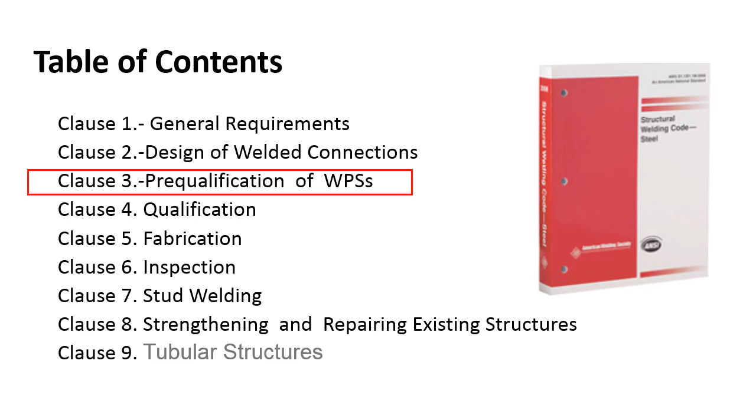Here's our table of contents for AWS D1.1. We're going to get into Clause 3, pre-qualification of WPSs, which is pretty much the meat of this welding code. Clause 3, 4, 5, and 6 to me are the heavy bulk of the code, and now that they've added tubular structures, Clause 9 is pretty important too. I'm not saying Clause 1, 2, 7, and 8 aren't important, but they aren't the meat of the code to me. They're a garnish - like when you go out for a steak dinner, they're the side order, some kind of side salad. Not the main course.

Pre-qualification of a WPS: welding procedure specifications shall be defined as exempt from the WPS qualification testing required in Clause 4. All pre-qualified WPSs shall be written. In order for a WPS to be pre-qualified, conformance with all of the applicable requirements of Clause 3 shall be required. WPSs that do not conform to the requirements of Clause 3 may be qualified by tests in conformance with Clause 4. For convenience, Annex P lists the provisions to be included in a pre-qualified WPS, which should be addressed in the fabricator's or contractor's welding program.

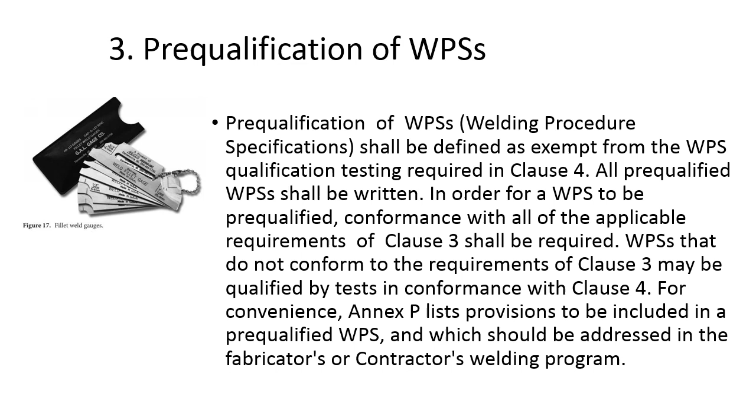So that's telling us what I've said three times already - you've got to write it, and if you don't follow all the criteria as laid out in Clause 3, you're going to have to do a qualification per Clause 4. Annex P isn't technically part of this code, but it sort of is. It just lists all the provisions to be included in a pre-qualified WPS - a little checklist you go through to make sure you've addressed everything. Not everything is applicable to every type of weld, so when you're writing one, go into Annex P and take a look at what they've got going on.

Annex P, informative: some important contents of a pre-qualified WPS. Base metal and filler metal combinations - what are you welding to what, you need to address that. Minimum preheat and interpass temperature requirements. Limitations of WPS variables: amperage, voltage, travel speeds, whatever is relevant to what you're welding.

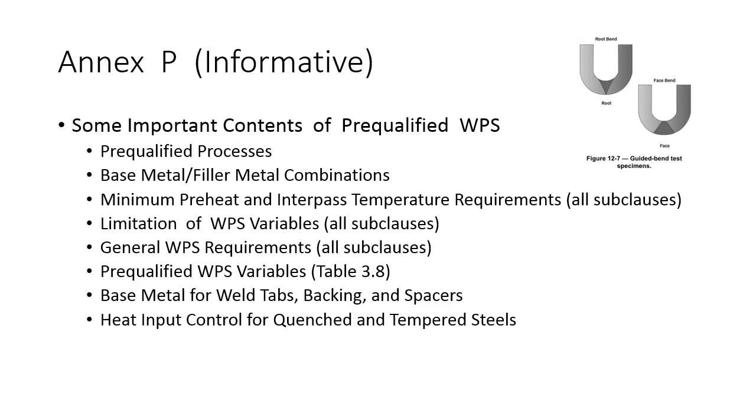General WPS requirements. Pre-qualified WPS variables: shielding gases, voltage, amperage, whatever - that's listed in, I think, Table 3.8. Base metal for weld tabs, backing, and spacers. Heat input control for quenched and tempered steels. So Annex P is just going to line out everything you need to do for a pre-qualified WPS. You go down through this checklist and make sure you've identified everything, write it down, double check it a couple of times, and you should be ready to go.

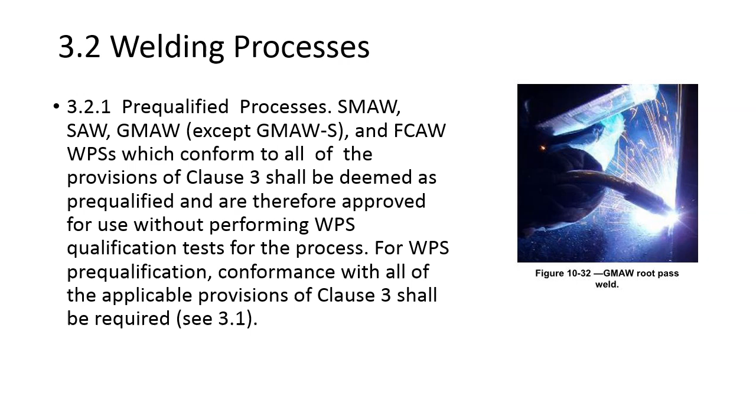Welding Processes, 3.2.1, pre-qualified processes: shielded metal arc welding, submerged arc welding, gas metal arc welding except for gas metal arc welding short circuiting, and flux cored arc welding. WPSs which conform to all the provisions of Clause 3 shall be deemed pre-qualified and are therefore approved for use without performing WPS qualification tests for the process. For WPS prequalification, conformance with all of the applicable provisions of Clause 3 shall be required. So first off, it has to be one of these four processes, and you can't use gas metal arc welding short circuiting.

Once again, the processes for pre-qualification: you can use shielded metal arc welding, submerged arc welding, flux core arc welding, and gas metal arc welding in the spray or globular transfer modes.

Unacceptable and needing a PQR: electroslag welding, electrogas welding, gas metal arc welding short circuit, and gas tungsten arc welding, or TIG. You can use these processes with this code, they're just not pre-qualified. So if you want to do TIG or electroslag, have at it, you just need to qualify it.

You got to run a test coupon, do some bend tests, X-ray, whatever, and prove that you can run the process and get a quality, acceptable result that meets all the applicable mechanical properties. So you can use those processes on the far right, but you just need to qualify with a PQR.

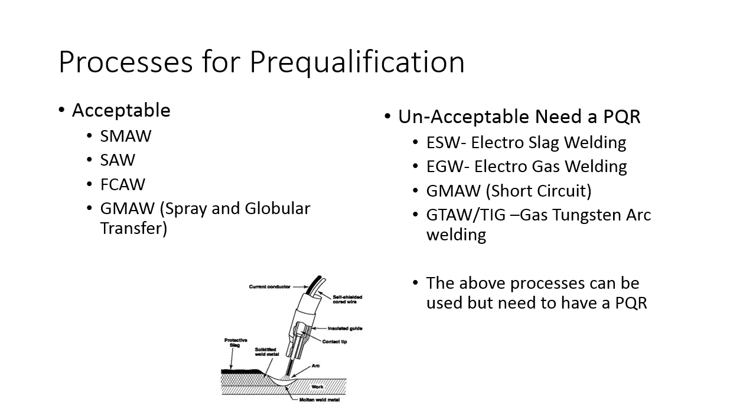You need to do a test plate, send it out to the lab, get some results, and write yourself a PQR to support your WPS. Otherwise, it's not acceptable for pre-qualification.

Base metal, filler metal combinations. Only base metals and filler metals listed in Table 3.1 and 3.2 may be used in pre-qualified WPSs. The base metal, filler metal strength relationships shall be used in conjunction with Tables 3.1 and 3.2 to determine whether matching or undermatching filler metals are required.

So what's that telling us? It's telling us that you have to use a base metal that's listed in here, and you have to use a filler metal that's listed in here. You can't use something that came out of China or whatever where they tell you, oh, this is basically A36. Unless it has paperwork that says it's A36, you can't use it.

Same with filler material. It's got to be listed as an AWS filler material and fall into one of the filler material categories listed in Table 3.2. So you need to make sure everything matches up.

I used to review WPSs coming out of Asia, and they'd say, oh yeah, we're going to use a pre-qualified procedure because this material is similar to A36. Well, it's not A36, it's a Chinese material, a Chinese specification. It does not fall into an exact category. Therefore, it's not pre-qualified. Qualify it and then let us know.

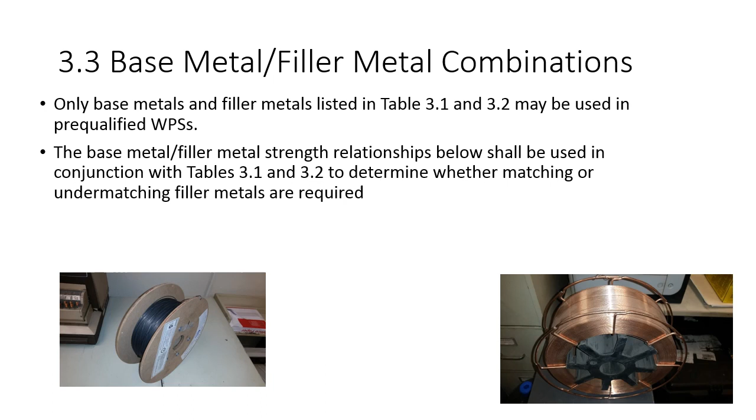Okay, if we look at Table 3.1, I'm not going to go through every base metal on there, we're going to hit the high points. The base metals in Table 3.1 are broken down into 4 groups, Group 1, 2, 3, and 4. If you're looking at the table, you'll notice there's a whole bunch of Group 1 materials.

Those are all your garden variety, pretty easily welded type materials. Group 2 is a little more, generally a little stronger, with a little higher tensile strength and a little higher yield strength. So all these materials got grouped into Group 2. Group 1 and Group 2, for the most part, are not too difficult to weld.

By the time you get to Group 3 and Group 4, these are the higher tensile strength materials. Instead of an E7018, they might need an E8018, or a filler material with an 80 KSI tensile strength. So Group 3 and Group 4 are stronger materials and generally a little nastier to weld, and they have different preheat requirements also than Group 1 and Group 2 do.

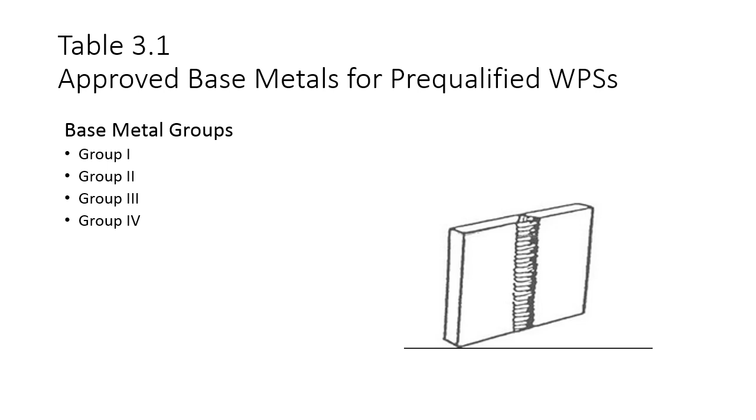So when you're using pre-qualification, you need to make sure which group the material you're going to use falls into, and it's got to fit into one of these. If it's not listed in one of these base metal groups, you can't use it. So realize there are groupings for the base metals.

So it's telling us that with Group 1, the matching filler metals for shielded metal arc welding—and this is a simplification too, you can read it for yourself—Group 1, we can weld it with E60XX. We can use 6010, 6011, 6012, 6018, whatever, and we have no issues. We can use E70XX: 7010, 7011, 7014, 7016, whatever, 7018. Not a problem. Group 1 to Group 1.

We can use those filler metals with those base metals. Group 2, you'll notice we've upped the ante. We can't use the 60 KSI materials anymore. We can't use 6010 to weld this material.

We've got to use 7015, 16, 18, or 28. This is for shielded metal arc welding, of course. And then by the time we get to group 3, we can't use the 70 series. We can't use 7018, 7028, none of that. We've got to use 8015, 8016, and 8018.

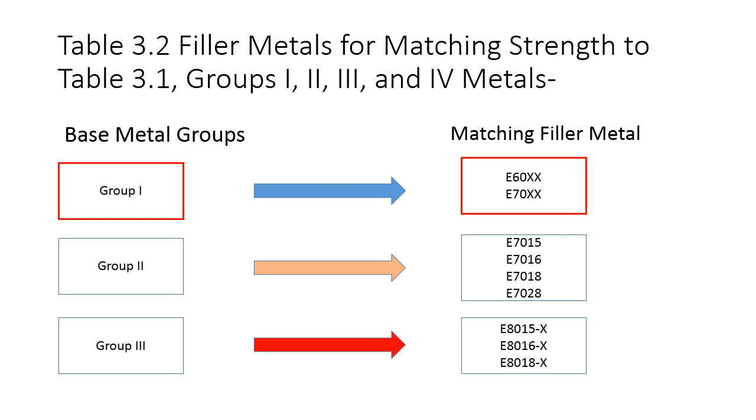So as we're going up the group metals from group 1, 2, to 3, we're increasing the tensile strength of our base material and the yield strength. So our material properties are different. So to make a sound weld, and deposit sound weld metal into said weld joint, we've got to have a matching filler metal. And that's what this table gives us. It tells us what we can use with which base metal grouping.

Engineer's approval for auxiliary attachments. Unlisted materials for auxiliary attachments, which fall within the chemical composition range of a steel listed in Table 3.1, may be used in pre-qualified WPS when approved by the engineer. The filler metal and minimum preheat shall be in conformance with 3.5 based upon similar material strength and chemical composition.

This is where you've got a clip or some auxiliary attachment. And by auxiliary attachment, I don't mean a main beam or a clip welded on there that's going to support something tangible. This is an auxiliary attachment, some little piece somewhere that needs to be welded on. That to me is my opinion of an auxiliary attachment.

If you have such an auxiliary attachment, let's say the steel comes from Lithuania and you've got paperwork, and you look at it and it comes out to be a group 2 steel, more or less—it falls within that category—the engineer can say, yeah, use that pre-qualified weld procedure to weld this metal to this metal. It's close enough metallurgically, mechanically, it's not going to be the end of the world. That's what 3.4 means to me: it's not a main beam or a main component, so we can just use this pre-qualified WPS and it'll hold.

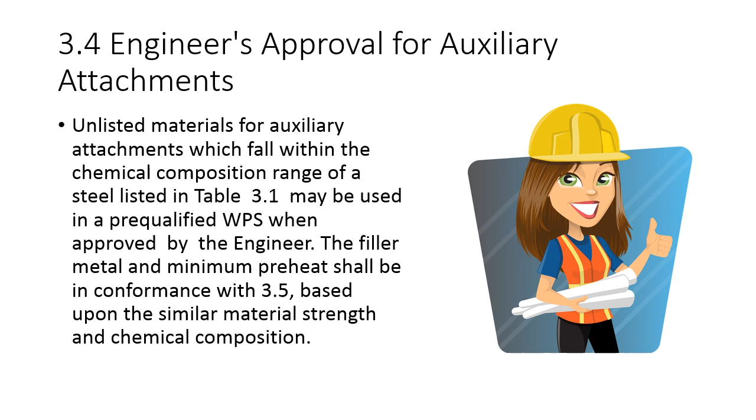Minimum preheat and interpass temperature requirements, 3.5. Table 3.3 shall be used to determine the minimum preheat and interpass temperatures for steels listed in the code. 3.5.1, Base metal thickness combination: the minimum preheat or interpass temperature applied to a joint composed of base metals with different minimum preheats from Table 3.3, based on category and thickness, shall be the highest of these minimum preheats.

So that's telling us that if we are welding a group 1 material to a group 3 material using a pre-qualified procedure, we have to look at this table and Table 3.3, and that's going to give us the minimum preheat. So as the group 2 and group 3 materials are a little more difficult to weld, and they have used 70 KSI and 80 KSI weld material, they're going to need a little higher preheat. They're a little more delicate, so they're more susceptible to cracking.

So they're going to need preheat, especially when you're welding somewhere like Alberta. Maybe if you're welding in Bangladesh, or somewhere in India where it never gets really cold, in the tropics, you're probably not going to really need to preheat things. You might for a thicker material, but for the most part, you're probably not going to need to. But if you're welding in Alaska, Siberia, northern China, the United States, or Finland, you're going to need preheat, and you're going to need to make sure that you've addressed that preheat. So that's what it's telling us.

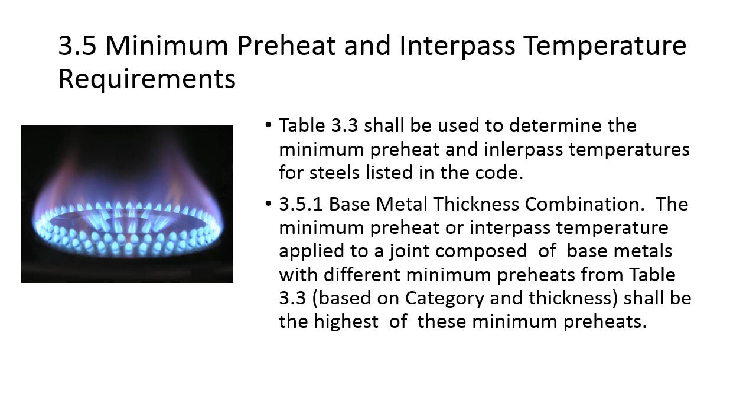In the left hand, it tells us our steel: ASTM A36, or way down here at the bottom, we've got API 5L, grade B or grade X42. So that tells us our material, and then we're going to weld it with stick, and then it tells us our thicknesses, and over here on the far right, the minimum preheat and interpass temperature. So anything over 2.5 inches, we're going to need to preheat the material up to 300 degrees before we even strike an arc. That's what table 3.3 is telling us.

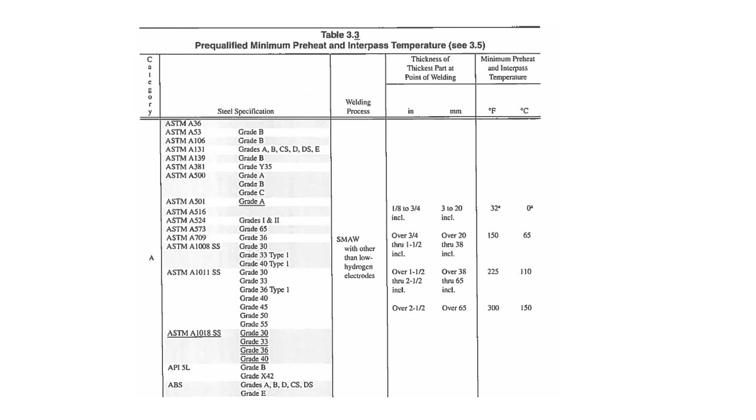It's got a whole bunch of examples as we go down through it. The higher you get, category B, C, D - as you go further down, you're getting higher tensile strengths, and you're going to need different preheats that are more appropriate for those base materials and the carbon content and the metallurgy of those base materials.

Importance of preheat. Section 3.5 of AWS D1.1 is explicit about minimum preheat and interpass temperature requirements. The preheat and interpass temperature shall be sufficient to prevent cracking. Table 3.3 shall be used to determine the minimum preheat and interpass temperature for steels listed in the code.

It can't be understated how important preheat is, especially the further north you get. I live in Texas. It's not the end of the world down here because everything seems to be about 75 or 80 degrees most of the time. I mean, we get a little bit of cold, but not much. But I grew up in Montana, way up north, and I worked in Iowa. Or if you're in North Dakota or even up in Canada, preheat is a biggie with all these steels.

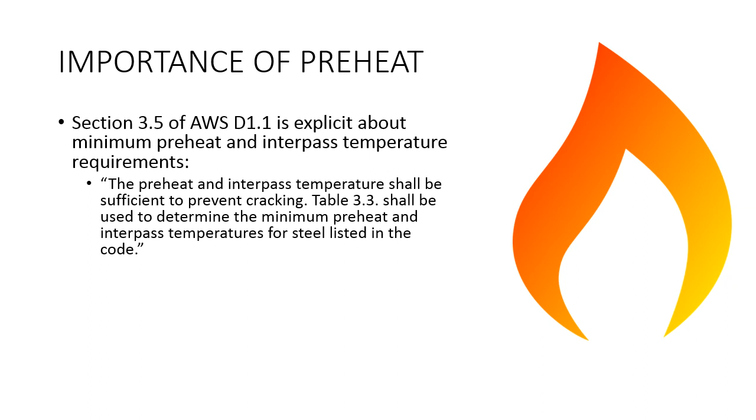So you don't want cracking. You don't want cracking when you're welding it, and you don't want cracking later on, some kind of delayed cracking mechanism. So preheat's important. You've got to follow the rules for preheat to be within the code.

Importance of preheat continued. Reasons to use preheat are: it drives off excess surface moisture, hydrogen. We all know that hydrogen gets into your weld puddle, bad things can happen, cracking. You can get porosity. A lot of different things can go on.

It slows the cooling rate in both the weld metal and the base metal, thereby lowering hardenability and making the weldments less likely to crack. That cooling rate in both the weld metal and base metal, it makes those areas a lot less hard when you cool it slow. So if you put heat into the part before you even start welding, a little bit of thermal energy into the part before you start welding, on the tail end after you're welding, that heat's going to be there and it's going to cool a lot slower.

It allows more time at higher temperatures for the hydrogen to diffuse. Less hydrogen in the weld and base metal lowers the tendency to crack. So it allows, as those hydrogen atoms are swimming around in your weld puddle and the base metal, those guys swim faster and they want to escape. The hydrogen doesn't want to be in your weld metal. It wants to get out. And the only time it's having a problem is when it gets trapped in there and it's wanting to get out, so that it makes bubbles and cracks.

So if you give it a little more time to get out and get free, that hydrogen wants to go somewhere else. It does not want to be in your weld pool. So if you give it some extra heat to get out of there, it's going to go. You just got to help the hydrogen find wherever the hell hydrogen wants to go, and it'll go there. But you got to throw some heat into the part to do that, and this will help save you from cracking.

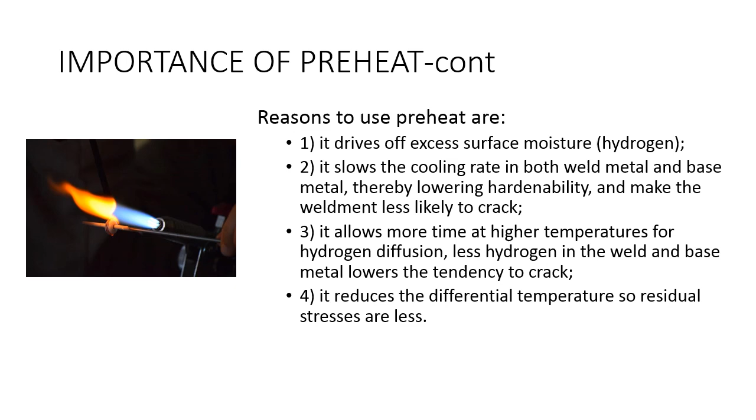Limitations of WPS variables. All pre-qualified WPSs to be used shall be prepared by the manufacturer, fabricator, or contractor as written pre-qualified WPSs and shall be available to those authorized to use or examine them. The written WPS may follow any convenient format. See Annex M for examples.

The welding parameters set forth in Table 3.6 shall be specified on the written WPS and for variables with limits, within the ranges shown.

Changes to the essential variables beyond those permitted by Table 3.7 shall require a new or revised pre-qualified WPS, or shall require that the WPS be qualified by test in accordance with Clause 4.

So what did that just tell us? That told us that you've got to write it down. I've been telling you, just because it's pre-qualified doesn't mean you don't have to have it written down. You also have to have it available to the inspectors and to the welders using them. You can't just tell them, hey, weld this. The welders need to be able to look at this so they know they're doing it right.

The written WPS may follow any convenient format. You can make up your own format as long as it's understandable. They have a suggested one, but if you don't use that, it's not the end of the world. Nobody's going to force you to.

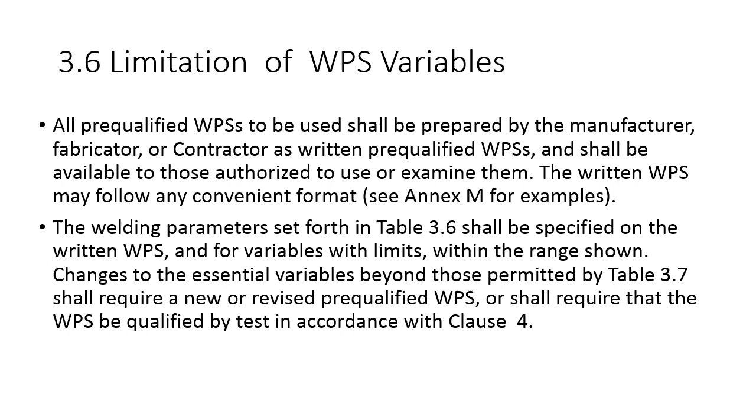Table 3.6 and 3.7 are very important because they set out the welding parameters and the essential variables. Table 3.6 will tell you positions, sizes of electrodes, voltages, amperages, whatever. It's all in Table 3.6, and you need to address everything in Table 3.6 on your WPS or some linking document. Table 3.7 is going to tell you all the essential variables that you need to address. So we'll take a look at that in the next couple.

Table 3.6, Prequalified WPS Requirements. Maximum electrode diameter - it tells you, for shielded metal arc welding, what are the maximum electrode diameters you can use for fillets, grooves, root passes in the flat position, or the maximum current. So it tells you how much current you can use, maximum root pass thickness - for shielded metal arc welding, the maximum root pass thickness going in the overhead position is 5/16 of an inch. That's the kind of stuff that's listed in Table 3.6.

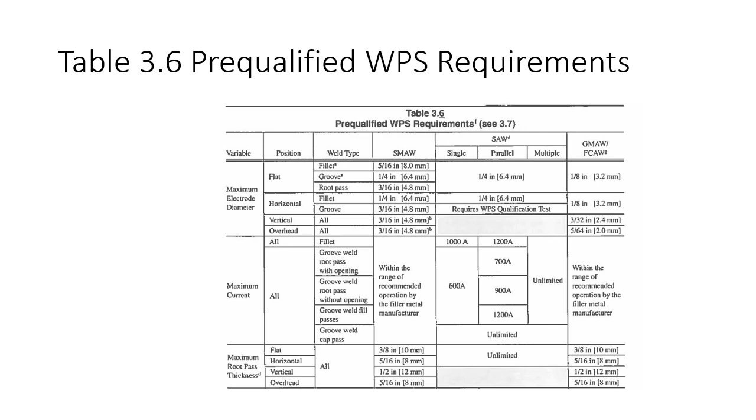3.7, General WPS Requirements. All the requirements of Table 3.6 shall be met for pre-qualified WPSs. So then it gives us a laundry list of things listed in Table 3.6: vertical up welding requirements, width and depth pass limitations, 3.7.3.2 single pass fillet weld sizes. These are all the kinds of things listed in Table 3.6 that need to be addressed.

So on your WPS, these are all important items that need to be addressed. You can't just blow them off. When I used to review WPSs, I'd hammer people for these - fix this, fix this, fix this. You need to address this, go to this table. So if you're submitting something for review by another party, you're going to want to make sure you've addressed everything in Tables 3.6 and 3.7, or you're probably going to do it again and again until you do address it.

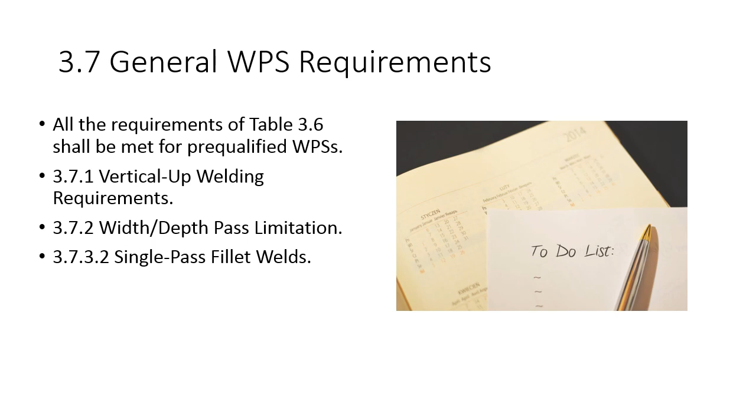Table 3.7, Pre-qualified WPS Variables. Okay, so this table tells us the variables.

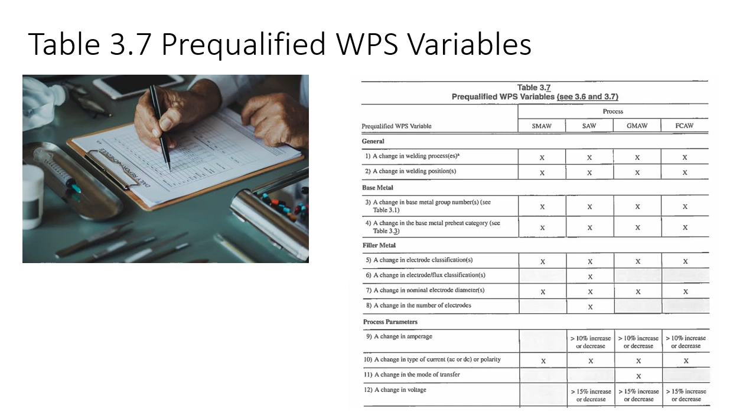If you change from shielded metal arc to gas metal arc, you need a new WPS. A change in welding positions, you need a new WPS. A change in base metal group - so if you go from group 1 to group 3, you need a new WPS. You change the electrode - let's say in shielded metal arc welding you go from E7018 to another electrode - you need a new WPS. So you just got to go through this checklist and make sure you've addressed everything. And not every variable is applicable to every welding process - things that are applicable to shielded metal arc welding are not applicable to submerged arc welding and vice versa. So Table 3.7 is very crucial in pre-qualified WPSs.

Joint design - okay, here's a couple of definitions before we go further. The complete joint penetration, CJP, groove weld is a groove weld that extends completely through the thickness of components being joined. The primary purpose for the use of the CJP groove weld is to transmit the full load carrying capacity of the structural components that they join.

The partial joint penetration groove weld is a groove weld that does not extend completely through the thickness of the joints or components being joined. So you've got two different acronyms, CJP and PJP - two different types of joints that you're going to use in pre-qualified joints.

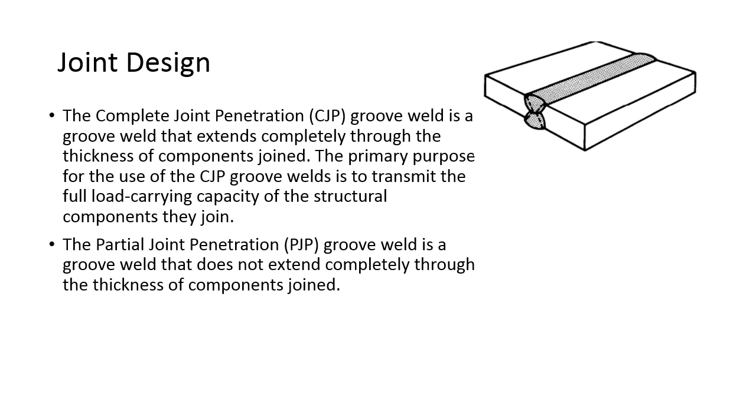The audiovisual department decided I needed a visual here, so here you go. Complete joint penetration is the upper one—you can see it's a full penetration weld through the full thickness of the two components being welded together. A partial joint penetration weld is a PJP. You can see it down below where it doesn't go completely through. It's just a partial weld.

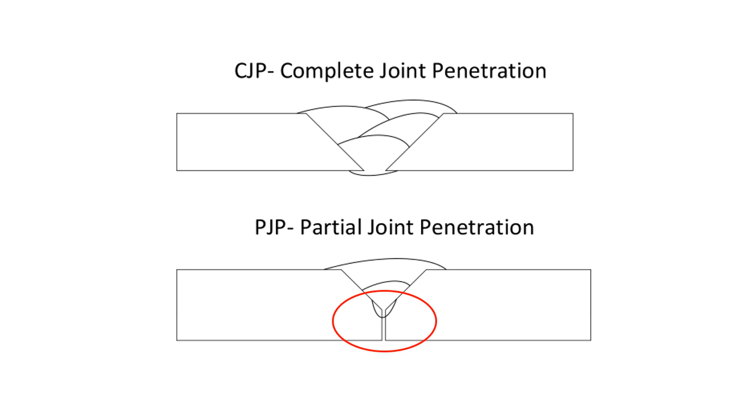So for whatever reason, the designer decided, hey, we don't need to completely weld these two joints together. We're not transmitting the full load, we're going to save some time and money, and this is the joint configuration we're going to use—a partial joint penetration weld.

Which brings us to paragraph 3.12, PJP requirements. The PJP groove welds shall be made using joint details described in figure 3.2, and the joint dimensional limitations described in 3.12.3 shall apply. So they give you a whole laundry list of PJP requirements.

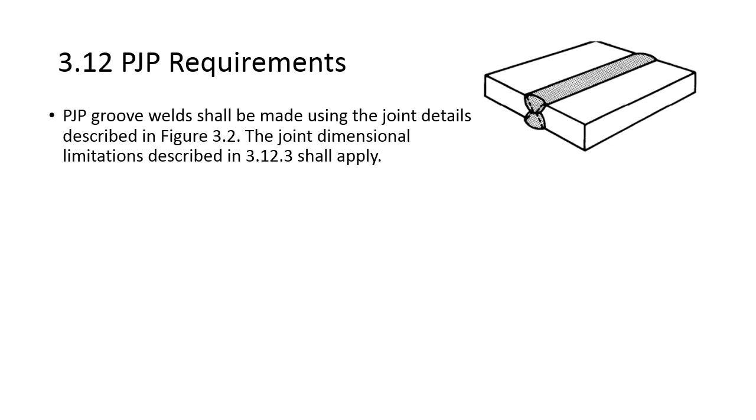They've got pictures of a whole bunch of different acceptable partial joint penetration welds that you can use on your pre-qualified WPS. So they've got complete joint penetration joint configurations in this book, and also partial joint penetration—both complete and partial listed in this book, about 25 pages worth. Here's an example of a pre-qualified joint design.

This is a complete joint penetration—you can see how it goes all the way through, and then it's got a backing strip on it. It tells you the welding processes you can use, and then all the groove preparations: the root, the thicknesses you need, how large you need the root gap, all the tolerances, and various other sundry items needed to complete this kind of weld. So here's an example, but there's just dozens of these kinds of joints that are pre-qualified for use in pre-qualified WPS.

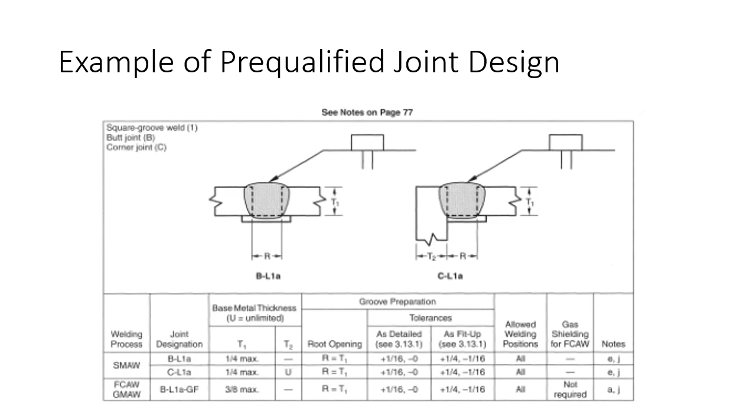Okay, summary. What did we cover? We talked about pre-qualified processes. We can't use gas tungsten, we can't use electroslag, we can't use short circuiting on gas metal arc. We have to use flux core, shielded metal arc, gas metal arc, or submerged arc. Those are our choices. If you're going to use something other than that, we can't use clause 3.

Base metal, filler metal combinations—you have to use what's laid out for you. It gives you a certain number of base materials that you can use, and certain filler materials that you can use, and you have to match those up.

Knowing what your base material is and your thickness, you've got to know what your minimum preheat and interpass temperatures are. You're going to look those up and list them on your WPS. Oh, the WPS also has to be written.

You've got to hit the requirements, the limitations of the WPS variables. Those are tables—remember we talked about tables 3.6 and 3.7. You've got to go through all those limitations and WPS variables and address all of them, making sure that for the process you're using, you've addressed all the essential variables in there.

Make sure you have all the general WPS requirements addressed—the pre-qualified WPS variables, I guess I'm rehashing that again. The base metal for weld tabs, backing, spacers, that needs to be addressed. And then we didn't really touch on it, but there's heat input control for quench and tempered steels. You also need to address joint design, what kind of joint you're using—is it a complete joint penetration or partial joint penetration. And that's pretty much it.

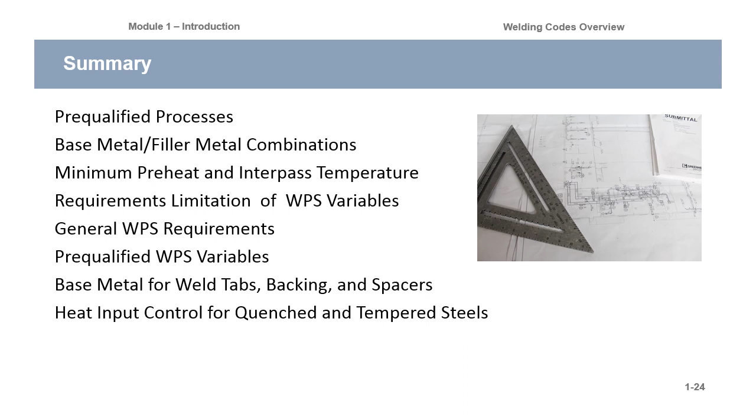But if you don't get confused or scared or sidetracked, and you just follow along through clause number 3, which is pre-qualified WPSs and how to write them, it's pretty self-evident. Just stay in that clause if you're using pre-qualified, and don't wander into any other clauses or chapters, whatever you want to call them. Just stay in there, stay in that little sandbox, go through the checklist, and you should be good to go. AWS D1.1 can seem overwhelming at times, but you just got to stay in the little sandbox you're playing in.